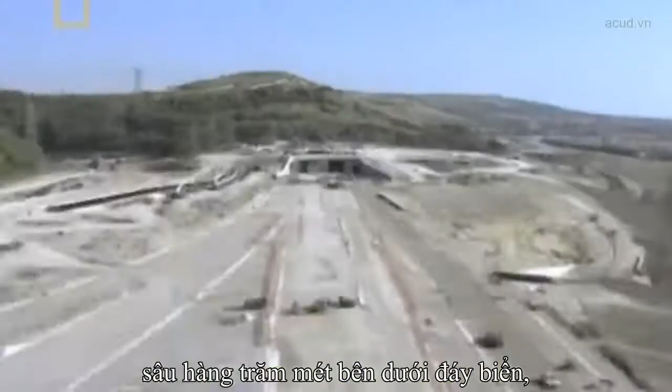Two countries divided by centuries of rivalry and warfare, and by 34 kilometers of treacherous open sea. It was a radical idea to dig a tunnel connecting them 100 meters below the rocky seabed. At stake, billions of pounds and the lives of 8,000 tunnellers. If it worked, it would be the world's longest undersea tunnel. But with terrifying floods, a horrific fire, and financial meltdown, the Channel Tunnel would dice with disaster right from the start.

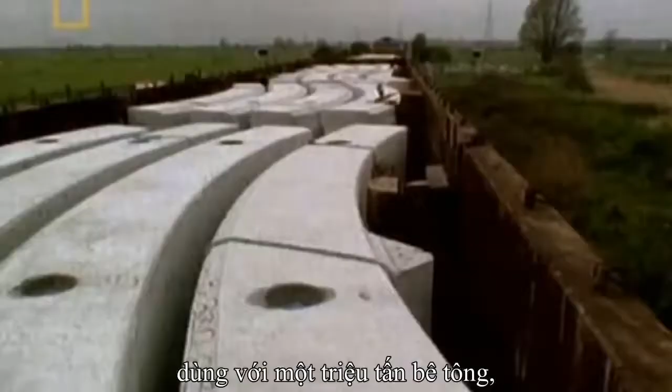This train is making an extraordinary journey that will take it under the surface of the Earth, through one of the world's biggest man-made structures. Engineers call it one of the 7 wonders of the modern world. The Channel Tunnel took 7 years to construct and devoured 1 million tons of concrete, enough to build the Empire State Building 3 times over.

Europe, the nations of Britain and France. Since Ice Age glaciers melted 13,000 years ago, they've been separated by this formidable body of water, the English Channel. At 34 kilometers across, it's twice as wide as the Grand Canyon. The two nations spent hundreds of years at war, right up to the last century. For many on both sides, it's still a love-hate relationship.

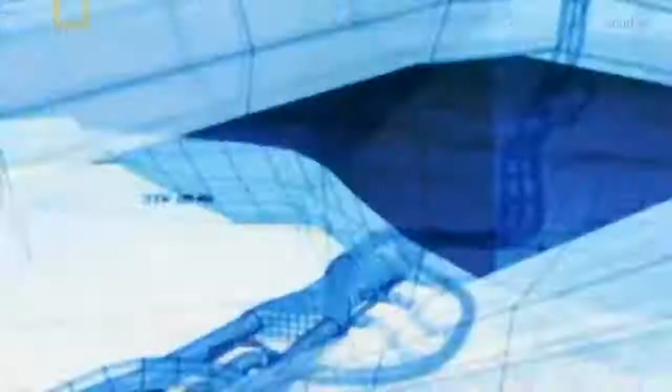So the idea of an undersea tunnel to link these one-time foes caused controversy. But the massive trade boost for both countries was an irresistible incentive. In 1986, British Premier Thatcher and French President Mitterrand agreed to build the Channel Tunnel. But the total £3 billion budget was put up entirely by private finance.

December 1987. The big dig begins. Heading underground were 2 armies of excavators, each over 4,000 strong, 1 French and 1 British. Each team would dig out from its own shoreline, racing to be the first to the midway point under the channel.

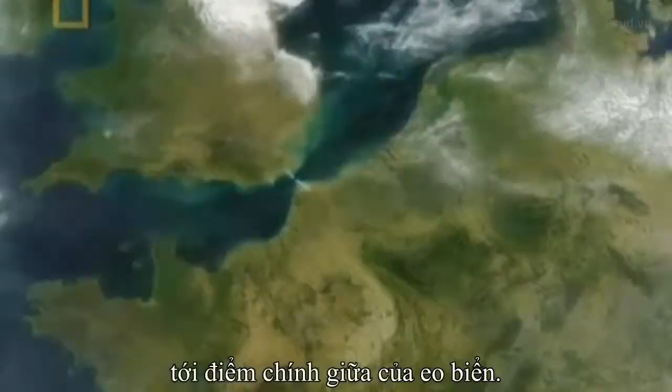The Brits were a tunnelling elite drawn from major worldwide underground projects. Calling themselves the Tunnel Tigers, they set great store by teamwork. One-man armies don't go very far. It takes quite a few lads to keep something like this going.

Commanding them is Chief Engineer Gordon Crichton. You had a team who were totally dedicated to building the job.

The French digging team were the underdogs, locally recruited and trained up for the project. It's the first time any of us have done a job like this. Everyone's proud to be involved.

Leading the French troops was Laurent Leblanc. I couldn't believe I was actually working on such an exciting and colossal project. For me, it was absolutely incredible.

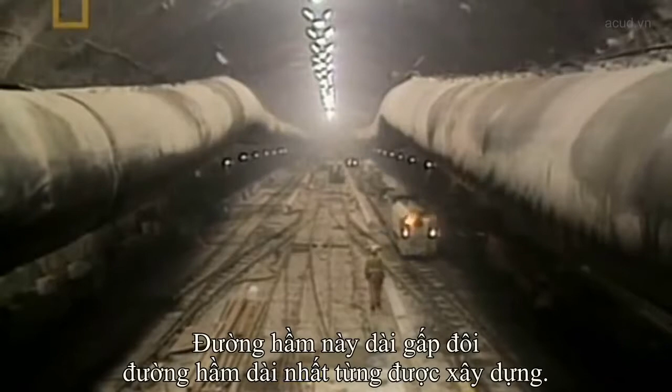The Channel Tunnel would run twice as long underwater as any previous tunnel. The task facing the teams was huge. They had to dig 2 main rail tunnels, plus a central service tunnel, together as wide as a 4-lane motorway.

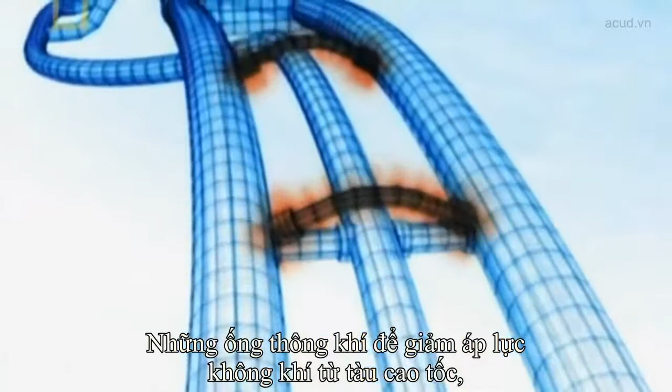245 cross passages, crucial escape routes in the nightmare scenario of a fire or accident in the tunnel. Above the tunnels, vents to release the huge air pressure from speeding trains. And giant crossover caverns, allowing trains to divert from one tunnel to the other to allow for maintenance. It all added up to a staggering 153 kilometers of tunnel to be dug.

As the dig began, the tunnellers were conscious of the vast scale and the real dangers of the task ahead. Above their heads, 100 metres of seawater and rocky seabed. Every day you wonder what you're going into. There's only one way in and one way out. Noisy, hot. You just think, what have I got myself in for, really?

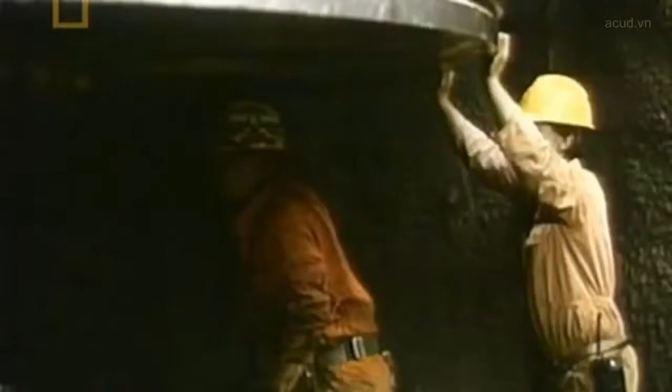Ahead of these tunnelling foot soldiers stood a 17-million-ton wall of earth and rock. It's not a job for claustrophobics. The job would push the men to the limit, but it would also make big demands on the technology of the day.

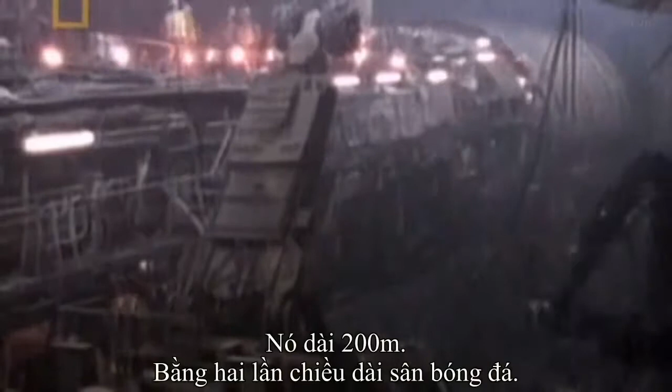Meet the tunnel boring machines. These underground leviathans spearheaded the Channel Tunnel dig. They were 200 metres long, that's the length of 2 football fields. They weighed 1,100 tonnes apiece, as much as a World War II destroyer. And they were twice as wide as a tank.

Yet, as Gordon Crichton reveals, the way that TBMs work is surprisingly simple. Imagine this is the bed of the channel. The machine is rotating underneath the sea, and as it rotates, the spoil from the tunnel is taken out the back, put into railway wagons and carried to the surface for disposal. Also, as it rotates, it erects a lining, a support round it, which is the permanent lining.

Expert tunneller Brendan Riley knew how central the TBMs were to the dig. Basically, the machine is a mini factory. The factory is provided with power, it's provided with water, it's provided with electric. It's a workshop of the machine, preventive repairs. Basically, it's self-contained, it's got everything.

11 French and British TBMs excavated the tunnels 24 hours a day, 7 days a week.

The TBM's high-tensile forged steel blades carved out 10 tons of rock with every turn. The biggest machines cost £10 million each, but as they've been specially designed for this one job, at the end they would simply be scrapped.

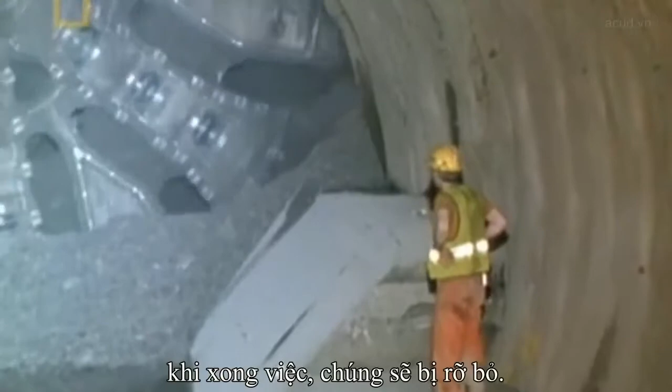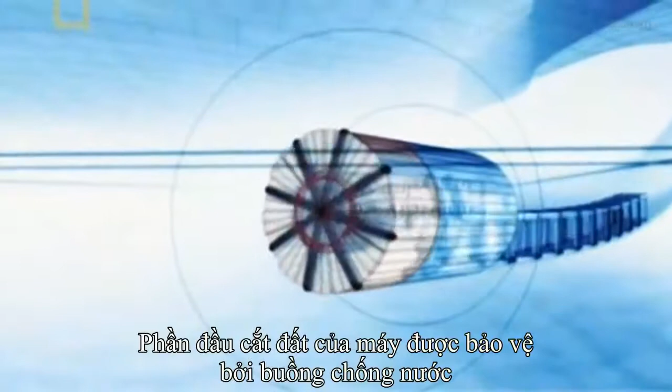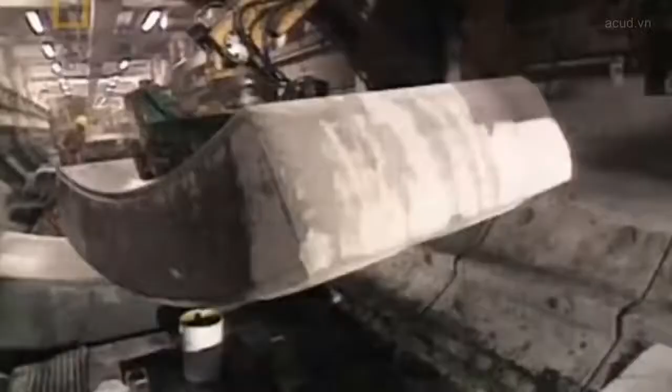The race between French and British tunnellers would be won or lost by their TBM's rate of progress. The Brits had the fastest machines, devouring up to 75 metres and 36,000 tonnes of rock a day. The French machines were 25% slower, but did have a key advantage: their cutting heads were protected by a waterproof housing that allowed them to work on safely, even through waterlogged soil.

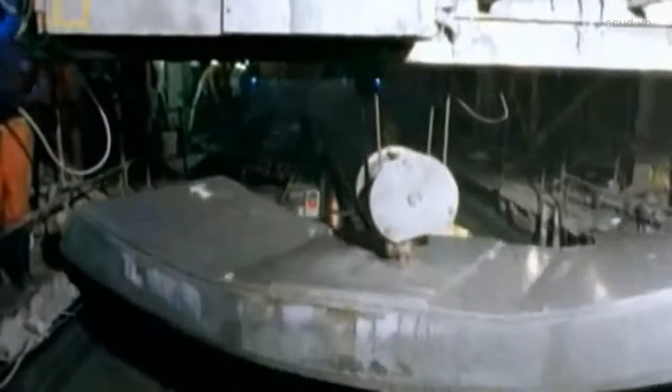1 month into the tunnel dig, with the ground staying dry, the speedier British TBMs began to get ahead. Every day, hundreds of concrete slabs were shipped in to line the tunnel roof as it was dug. They were as big as a family car and 3 times as heavy. This is no ordinary concrete. Specially made to a recipe using granite, it's stronger than the stuff they use to build nuclear reactors.

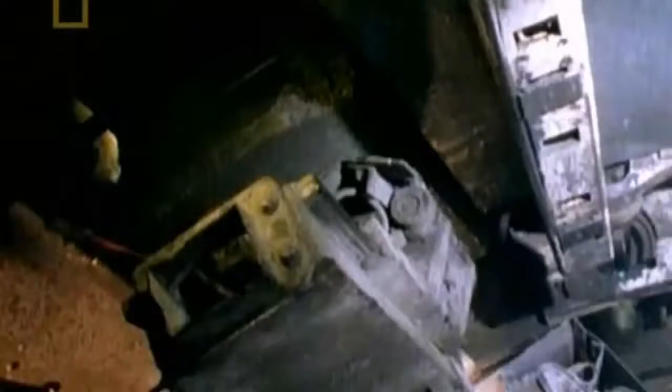The TBM's powerful hydraulic arms pushed the slabs into place, forming the tunnel wall. The TBMs had to be kept supplied with slabs and constantly moving forward. British Chief Engineer Crichton knew that the schedule was tight, and with the tunnel's £1.3 billion budget all put up by private finance, government bailout was not an option. With the dig costing £1 million a day, each hour's overrun would add £40,000.

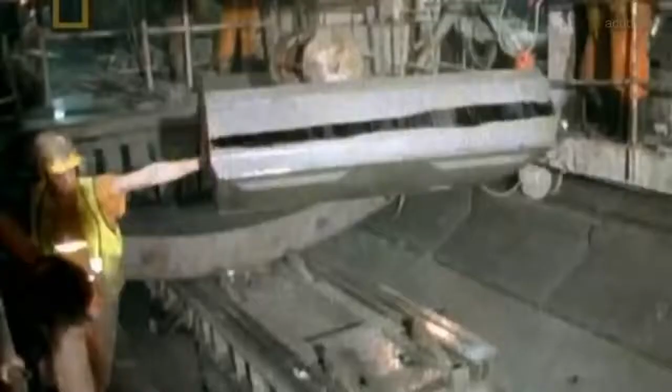By January 1988, the Anglo-French tunnelling race was hotting up, but the Brits were holding on to their lead. The rivalry underground is keeping the dig on schedule, but speed isn't everything. Success relies on keeping both tunnels precisely on target. If they stray off course, lives could be at risk.

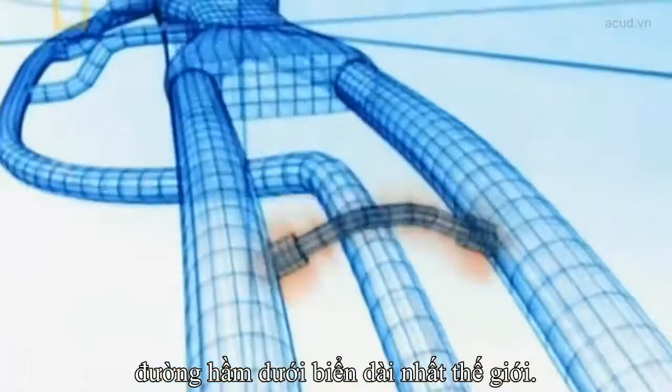It's enough to daunt the boldest of engineers. The Channel Tunnel Project, the longest undersea tunnel in the world. Two rival teams of French and British workers were each digging out from their own shoreline. The plan: to meet midway under the English Channel.

The tunnellers' goal was to win the race for the midpoint. But what kept the engineers awake at night was much more fundamental: the fear that the two tunnels wouldn't meet up.

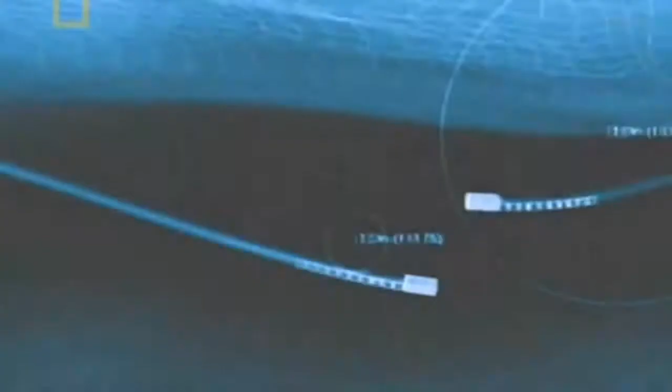If the two tunnels missed each other, that would mean last-minute course corrections, which could create sharp bends. And the high-speed trains that would use the tunnel had to have a broadly straight course to operate safely. The margin for error was frighteningly slim. The tunnels could not deviate by more than 2.5 meters. Being off target was not an option.

But lives were at stake too. If the massive tunnel-boring machines strayed off course, they could hit waterlogged ground. The result could be disastrous: flooding, or worse, tunnel collapse.

It was imperative that the TBMs were guided along a safe and accurate route. That meant conducting one of the world's longest and most in-depth underground surveys.

Rewind to August 1986, 18 months before tunnelling began. When surveyor Eric Radcliffe took on the job of plotting the tunnel's course, he knew the scale of the challenge he faced. France you can see over there, that's the French coast. So we had all that way to drive the tunnel and keep it online for that 38 kilometres. Actually, from here it doesn't look too bad, but it's a long, long way.

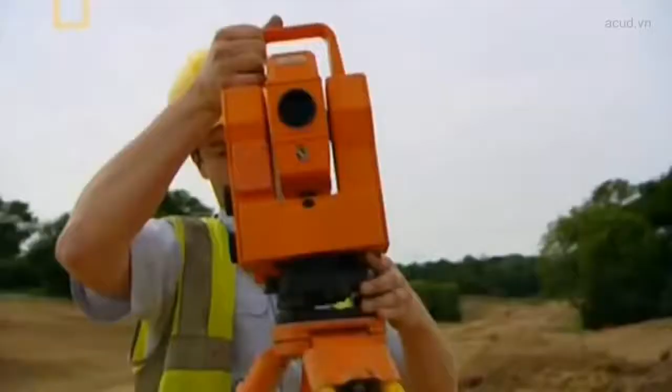Plotting an accurate course over such a long distance underground is a surveyor's nightmare. In tunnels, the normal rules of surveying don't apply. Surveyors normally work by measuring a series of angles at control points along the route. It's all a matter of geometry.

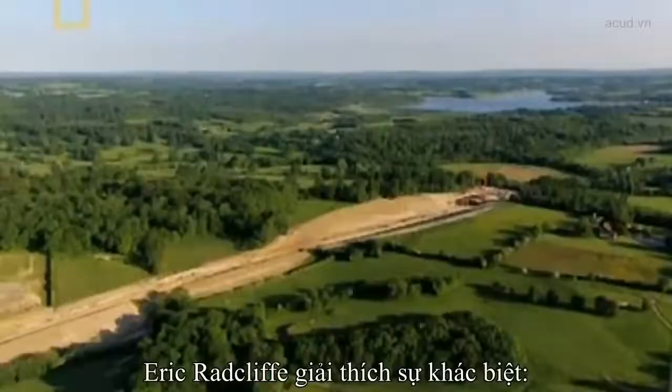Above ground, with 360-degree visibility, plotting a course is relatively simple. Eric Radcliffe explains the difference: the whole road is opened to the air, and all the survey control points from which you do the setting out are already established over the whole length.

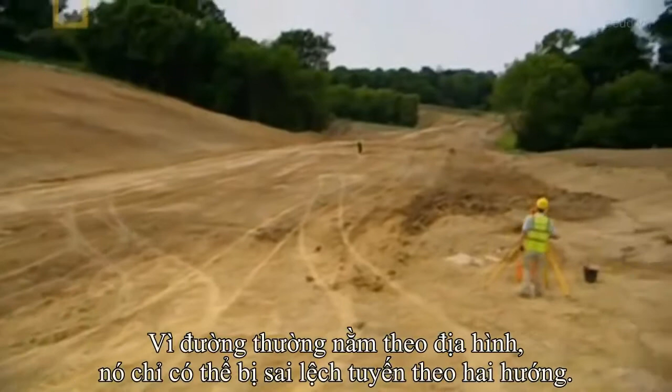Underground, there are obvious complications. All the surveyors can see is a wall of rock. They can't see ahead to plot the course. Roads have one other plus point over tunnels: because they're flat strips on the landscape, they can only go off course in two directions—left or right.

A tunnel occupies a three-dimensional space underground. It can go off course not only left or right, but also up or down. The two halves of the Channel Tunnel had 4 potential ways to miss meeting up. It's like asking a golfer to sink a hole-in-one blindfolded from 34 kilometers.

To keep the tunnel on course and on target, the surveyors had to use a secret weapon: geology. Along its underground route, the tunnel would be driven through a layer cake of different soil and rock types with very different consistencies. The geologists needed one stratum that went right across the channel. This stratum would provide a trail to help keep the British and the French tunnellers on course. But it must be exactly the right type of rock for tunnelling.

Jean-Luc Dessein was one of the geophysicists charged with tracing the perfect stratum for the tunnel to follow. On the French side of the channel, Dessein began his search. It would have to be waterproof to resist flooding, and compact enough so it wouldn't collapse during the dig.

In these cliffs, Dessein found his prize. Water poured over this seam of rock without soaking in, evidence that it was waterproof. The soft rock, impervious, so no water in the tunnel. This is a perfect situation for boring a tunnel. It's called blue chalk.

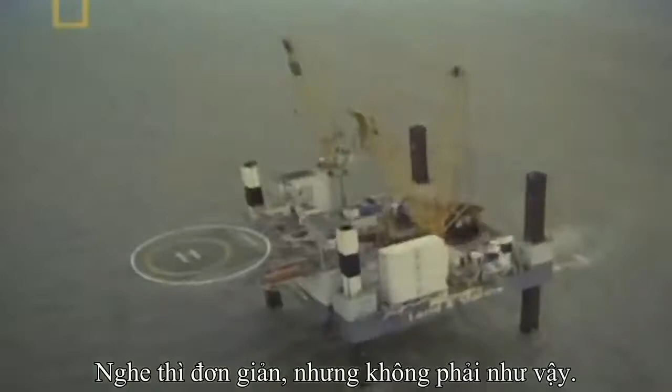But it was one thing to identify the ideal rock, another to discover its course. Geologists drilled a series of boreholes into the seabed and dropped probes that fired sound waves deep underground. The aim: to measure changes of speed in the sound waves as they passed through different rock and soil layers. It sounds straightforward, but it wasn't. Tracing the course of the blue chalk meant sinking 12 of these boreholes right across the channel, a tricky task in one of the world's busiest sea lanes.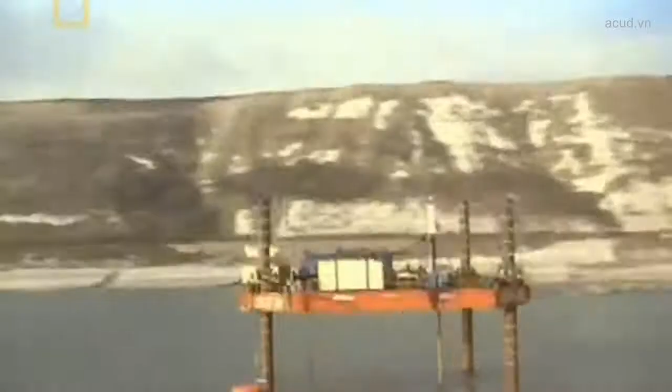You have a high traffic of vessels, you have tide, you have waves, so it's a difficult place for making accurate investigations.

The geologists concluded the blue chalk would provide a feasible route across the channel. If they were wrong and the TBMs left the waterproof strata, they could hit waterlogged ground, with devastating consequences, flooding or even tunnel collapse.

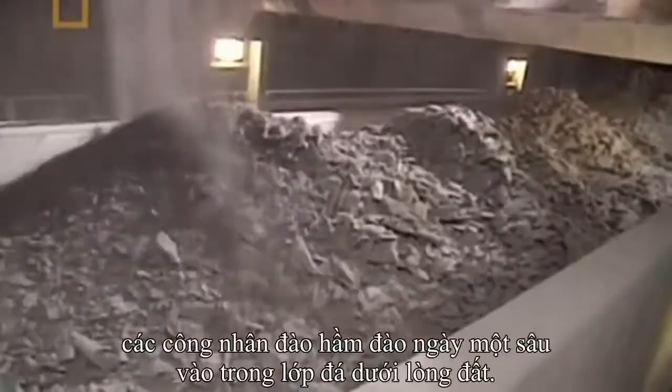Spring 1988, 3 months into the Channel Tunnel dig. The tunnellers were gouging their way through the rock deeper and deeper underground.

Standing between the tunnellers and the risk of flood was the TBM's laser guidance system. Laser guidance is commonly used to keep above-ground structures like roads on course, but underground it had to be used in a more imaginative way. Instead of looking ahead to see where they were going, the tunnellers looked back to where they'd been.

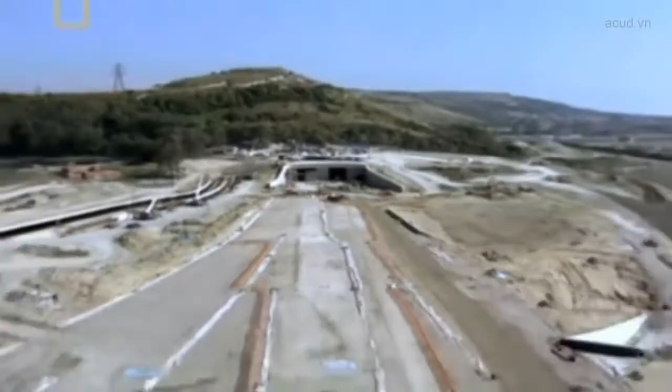Laser beams continually scanned backwards to the tunnel's start point to compare it with the TBM's changing location. Computers then checked this data against the surveyor's course coordinates. For tunneler Brendan Riley, the laser guidance system was one of the TBM's most impressive features.

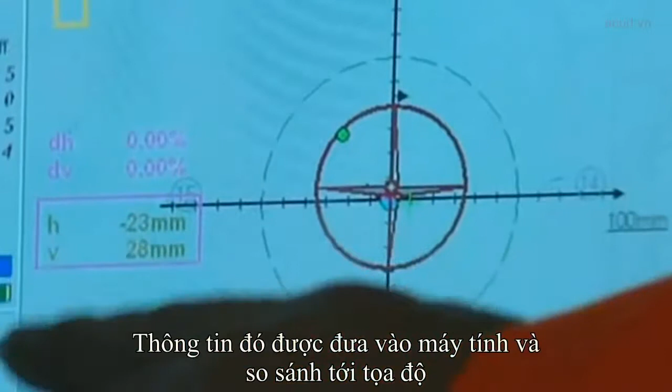As the machine moves forward, the laser monitors the change in movement to say whether the machine is moving left or right or up or down. With that information fed back into the computer, it compares that information with where the TBM should be at that known point in time, and gives that information back to the driver to say whether he needs to steer up or steer right.

As the tunnel face moved further from dry land, conditions for the men got worse. Engineering manager Ian Fugeman recalls the scene.

Anybody going to work had to travel in a cramped train up to 22 kilometres out to the place of work. By the end of the dig, the workers' trains had clocked up enough miles to go to the moon and back 4 times.

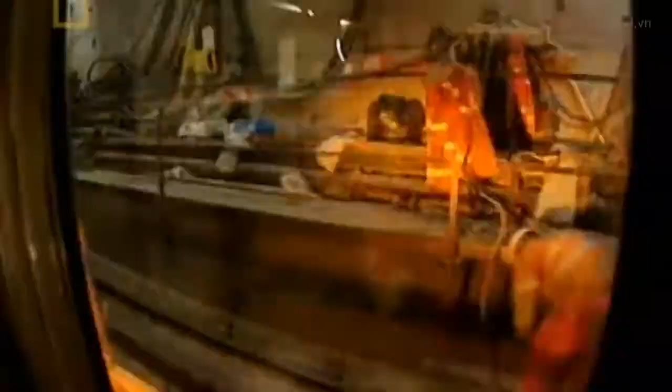This far underground, keeping the air fresh is a major challenge. A massive ventilation system pumped air to the tunnel face. But the men still faced the risk of encountering toxic gases.

The further in you are, the warmer it gets, the less air. We carried respirators with us. If there was an accident, we'd have enough air to breathe with.

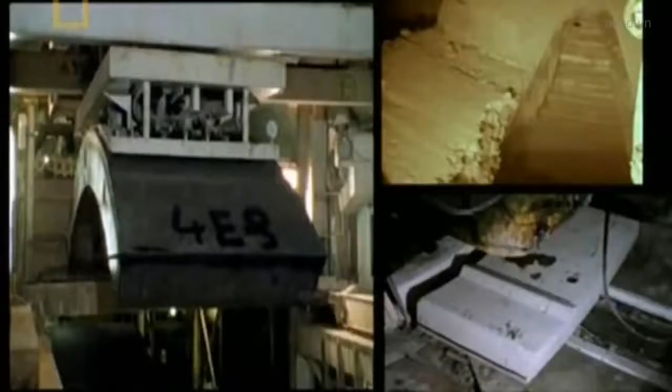But Chief Engineers Gordon Crichton and Laurent Leblanc, the frontline commanders of the tunnel dig, were starting to breathe easier. The schedule was holding up, and so was the layer of blue chalk.

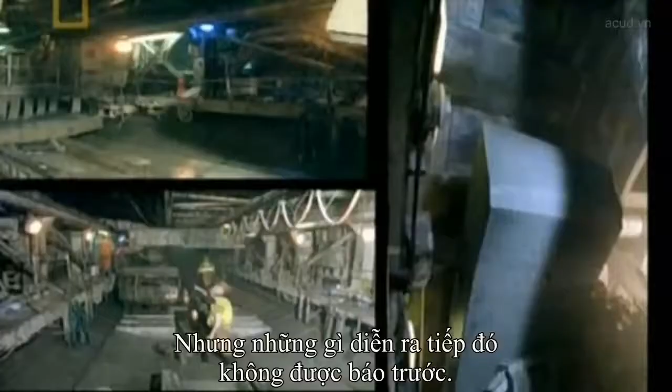But what happened next came without warning. March 1988, the service tunnel on the British side. Suddenly, what no undersea tunneler ever wants to see: water. Thousands of gallons of it flooding into the tunnel. Work comes to a halt.

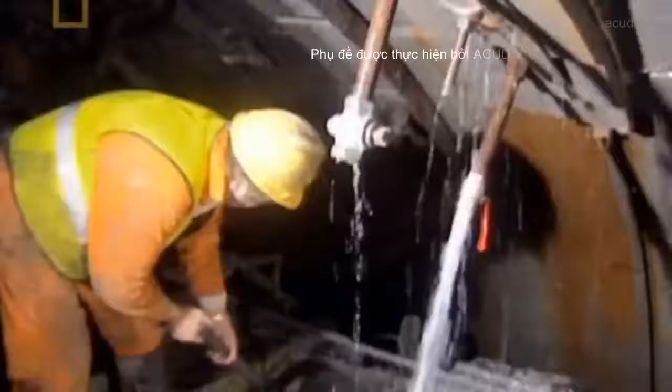That could cause panic. We have to stop straight away because you don't know exactly what you're going into. But Gordon Crichton must act fast to find out where the water is coming from.

Is this just a random pocket of fresh water, or is the sea itself breaking through? He tastes the water, and it's salty. We knew we had a path right to the channel itself. We knew it was serious.

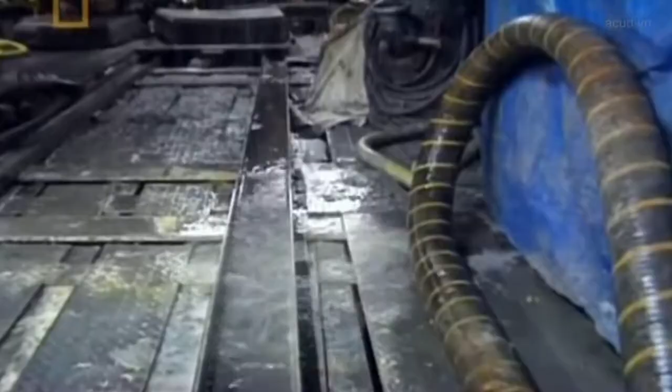It's disastrous news. What's coming into the tunnel is seawater. The men know that above their heads there's 3,000 billion tons of it. The pressure on the seafloor 50 meters above is enough to crush a car like a beer can.

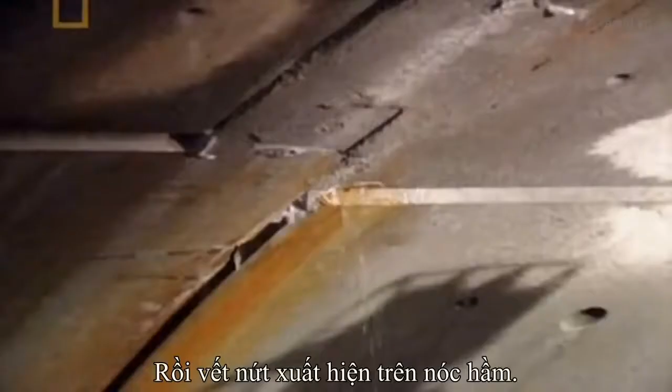Now, in places, the water starts to burst through with the force of a fire hose, 300 litres a minute. Then a crack appears in the tunnel roof. Rocks start to fall. The water is pouring through fissures and loosening lumps of the tunnel roof.

The British tunnellers might just be on the edge of disaster. If the cracks worsen, they might let in enough water to weaken the tunnel. Ultimately, it might even lead to the tunnellers' biggest fear: collapse. Chief Engineer Crichton must find a way to plug the leaks, or they could face catastrophe.

But how could this be happening? An 18-month survey identified the special layer of rock called blue chalk that was meant to be waterproof. But the geologists are quick to point out that surveys based on sound waves can reveal the course of a rock layer, but they can't give a definitive picture of the rock's quality. Now it turns out that the stratum of rock the tunnel is driving through is fractured, riddled with fault lines and cracks, something the surveyors could not have foreseen.

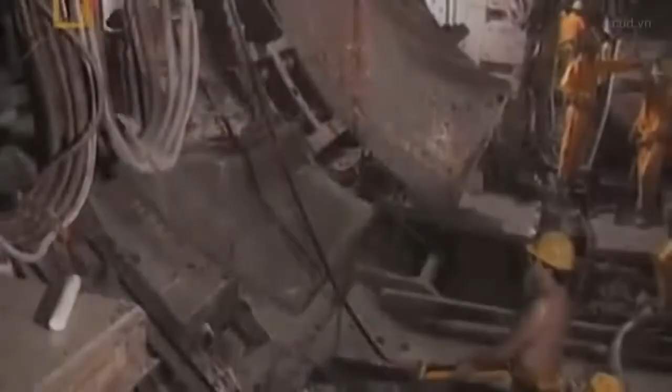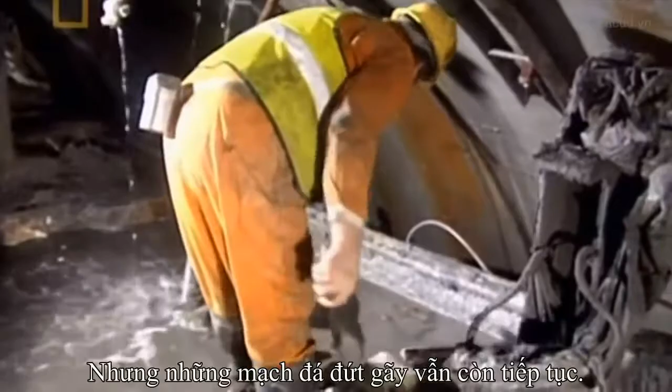Back in the British tunnel, Engineer Crichton averts disaster. The men plug the leaks and concrete liners are replaced by stronger cast iron versions. Crisis over for now, the tunnel tigers start to inch forward again. But the fractured ground stretched on, and the atmosphere was edgy.

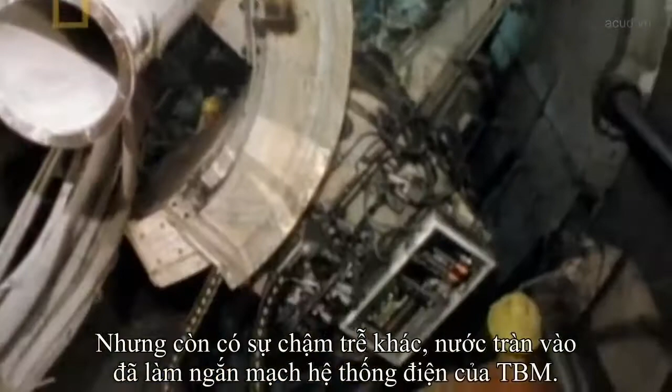Every ring that you cut, you were just hoping that it was going to be good ground that was there. But there were more delays as the leaks short-circuited the TBM's electrics. The clock was ticking. With every day, the costs were mounting, and the overspend was running into tens of millions.

The French side, meanwhile, had also hit water. We did indeed hit water. That made the job more difficult. A lot of water always makes the work harder.

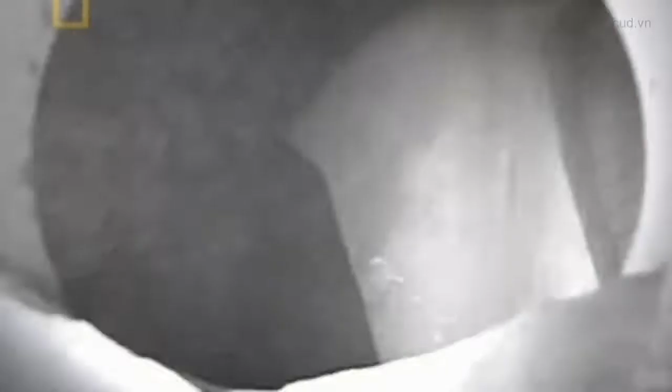But the French had been forewarned about fractured rock on their side. Features in the geology made it much simpler to analyse. Now the French decision to opt for waterproof tunnel boring machines finally started to pay off. Slower than the British TBMs so far, they now gave the French a serious edge.

We decided to use tunnel boring machines that were totally enclosed, totally watertight. These could resist any level of water leakage, no matter how severe. Meanwhile, the Brits slogged through the leaks and falling rocks and prayed for better ground. Workers rigged a form of makeshift armour plating on their TBM and pressed on.

January 1989. After a tortuous nine months, the British team finally hit drier ground. Massively behind, the pressure to catch up was now intense. Everybody worked long hours. We had to do it to the time, we had to do it to the programme.

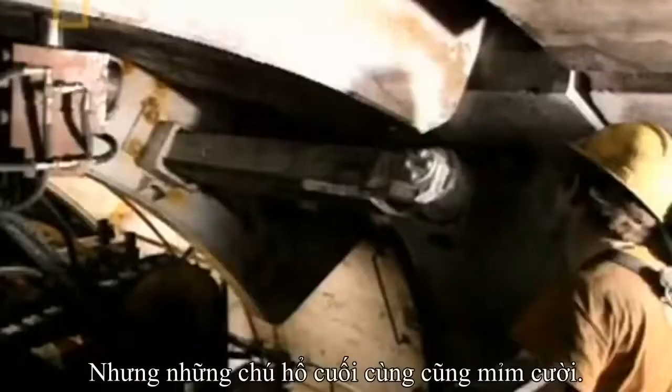But at last, the Tigers were smiling. The ground conditions come right, everything seemed to fall in place, and then we started taking off. The British tunnellers fought their way back into the race. We've done over 400 metres quite a few times in a week, and I personally think we could have done the half kilometre.

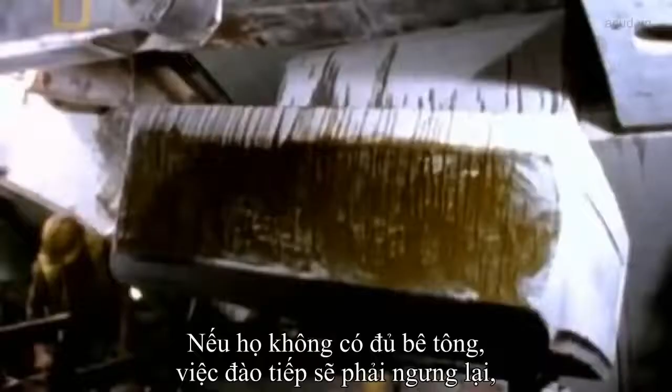But success came with a sting. The British progress started to stretch the supply of lining slabs. If the slabs ran out, their dig would grind to a halt, with a multi-million-pound meter ticking.

January 1990. The French and British tunnelling teams were two years into digging the record-breaking Channel Tunnel. The competition between the two countries was fierce as they dug out from their coastlines. If all went to plan, the tunnels would meet up some 18 kilometres out, midway under the English Channel.

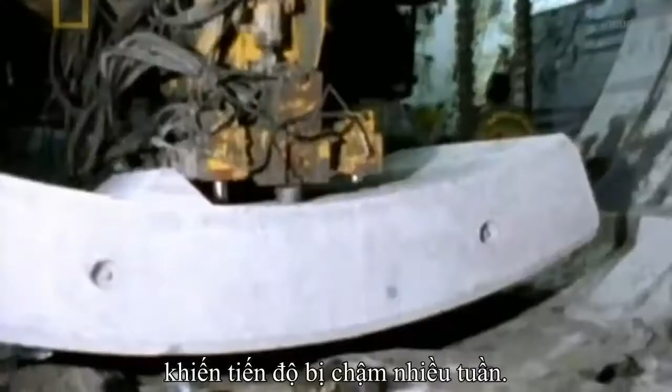Flood and rockfalls on the British side nearly spelt disaster and set progress back weeks. But now the Brits were catching up again, and the race for the halfway point was back on with a vengeance. But there's more to building a tunnel than high-speed digging.

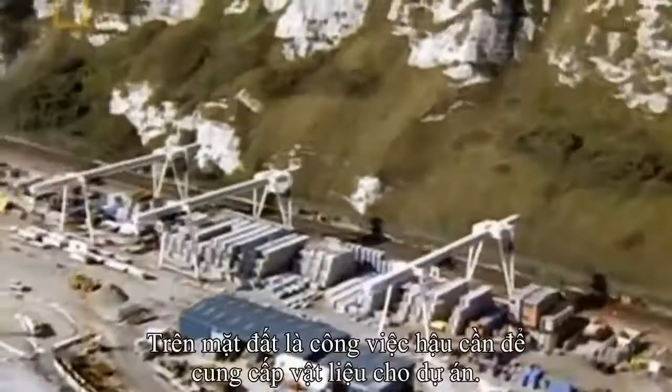Above ground, a huge round-the-clock operation kept the project fed with vital supplies, the most crucial ingredient of all being concrete.

Each slab weighs as much as a pickup truck. The French and the British together need 750,000 of them to line the tunnel.

In Britain, special trains carrying 4,500 tons of slabs, enough to construct 100 average houses, speed back and forth to the coast. But the British team was about to hit another problem.

The flat French shoreline provided plenty of room to store slabs close to their tunnel mouth, but 50-metre cliffs on the British side hugely restricted storage space. And as their tunnelling rate increased, space got tighter and tighter. If it ran out altogether, the supply chain would slow, the dig falter, and the mounting overspend could spin out of control.

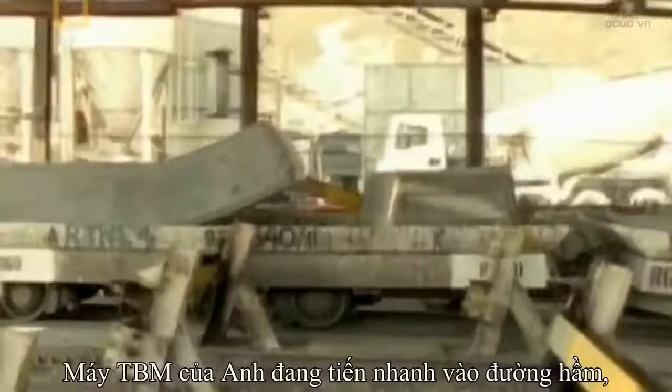The British TBMs were munching their way through the tunnel, but without slabs to line the roof, they would soon grind to an expensive halt. Luckily, somebody had a brainwave.

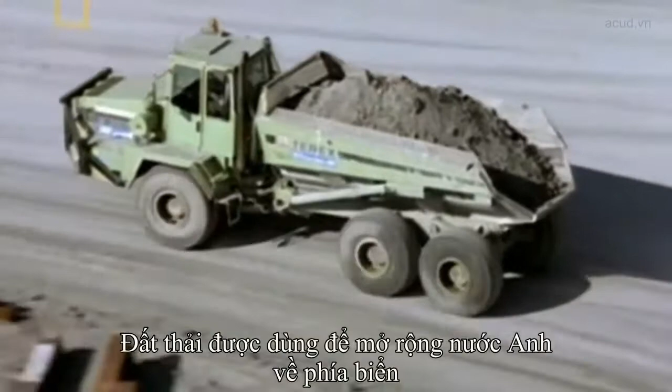Every day the TBMs produced up to 36,000 tons of unwanted rock and earth known as spoil. Why not use it to solve the storage problem? The spoil could be deployed to extend Britain's coastline out to sea, providing desperately needed space.

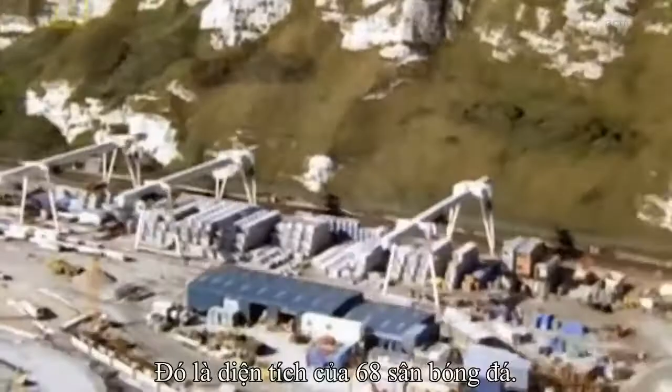It was an audacious plan. 17 million tons of spoil, enough to fill over 2,000 Olympic swimming pools, were dumped into the sea. The storage problem was solved, and Britain grew by 90 acres, the area of 68 football pitches.

Underground, the moment of truth was approaching as the French and British tunnellers edged ever closer together towards breakthrough point. The tunnellers were intent on reaching the middle first, but the engineers had bigger worries. After 3 years and 37 kilometres of tunnel dug, would the two halves actually meet in the middle?

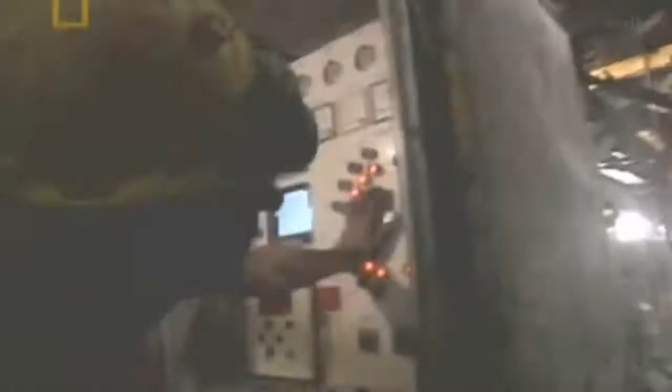The British reach what they think is the rendezvous point first, but are they anywhere near the French? As a small drill bites through the soil, a current of fresh air wafts through. Air from France.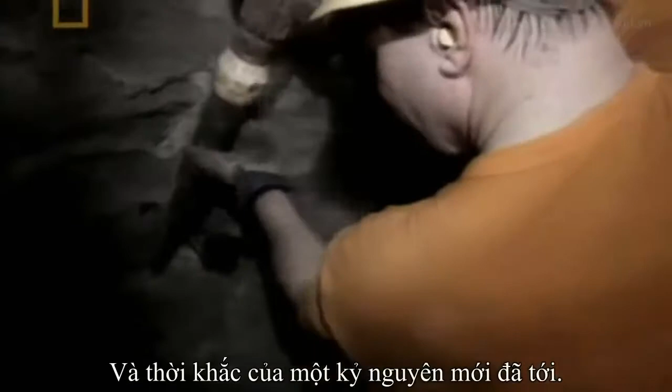French and British workers raced to punch through the last few centimetres of rock that had separated the two nations since the Ice Age. And then, an epoch-making moment. They're through! They're through! They're through!

And it's British tunneler Graham Fagg who takes the first step into French territory and into the history books. To me, it's just fine for a day. I'm just an individual who was part of a team.

To see Graham making that connection and putting his head through the hole and disappearing into France, as it were, for the first time, that was fantastic.

For the first time in 13,000 years, Britain was reconnected to the European landmass. And the surveyors were vindicated. The tunnels didn't just meet, they met a minuscule 35 centimetres off target, the width of a portable TV screen.

No one had ever done it before, over 38 kilometres. From a surveyor's point of view, that is a unique achievement.

The Tunnel Tigers basked in their achievement. I think it's great. We're getting past halfway, so I suppose in a way we beat the French. So the British won the tunnelling race.

But if the French had got to the RV point first, there would have been a wait while the Brits scrambled to catch up.

Here's why. Job done, the TBM's only value was scrap. But two machines were stuck head-to-head in a monster gridlock. One side's machine had to go. But what do you do with an 1,100-ton TBM that's past its use-by date?

Bury it. It was agreed that the British TBM would dive below its French counterpart to be entombed forever, 100 metres below the surface of the channel.

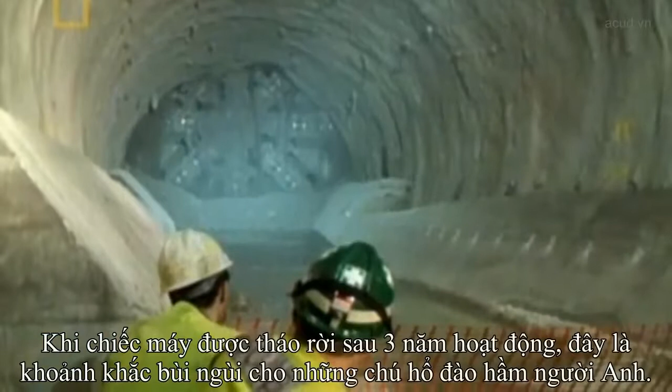As man and machine were parted after 3 years, it was a poignant moment for the Tunnel Tigers. You see the machines buried and you get a bit of a twinge, you know.

The French TBM was towed to Britain to be scrapped, so the Brits made the first breakthrough, but a French vehicle took the first trip under the channel.

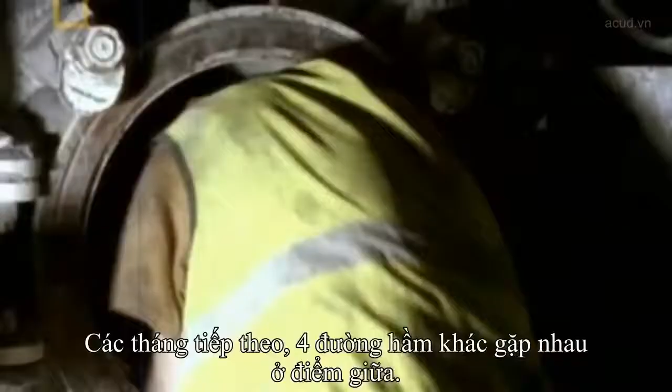Over the following months, the 4 other main tunnels met up in a flurry of breakthroughs. The tunnellers carved out hundreds of linking cross passages every few hundred metres. They drilled out the air pressure shafts. They finished off the crossover caverns. May 1991, the Channel Tunnel was finally dug.

The most important thing is that you can stand behind us and look straight through, and that's it.

For the French too, there was a tremendous sense of the significance of the moment. It's an historic moment. Napoleon tried to build a tunnel but failed. Now we have one Europe.

But behind the scenes of celebration, there was one group who weren't quite so jubilant: the tunnel's financial backers. The French and British might have dug the world's longest undersea tunnel, but delays saw the budget soar from 1.3 billion to over £2 billion.

And the job of building the international transport network serving the tunnel had only just begun. As the tunnellers headed home, another army of workers took over. They would build two huge terminals on either side of the channel, lay 195 kilometres of railway track, and to extract the heat generated by high-speed trains, fit a giant cooling system equal to 250,000 domestic fridges. They would also build new trains designed to carry cars, trucks and people through the tunnel.

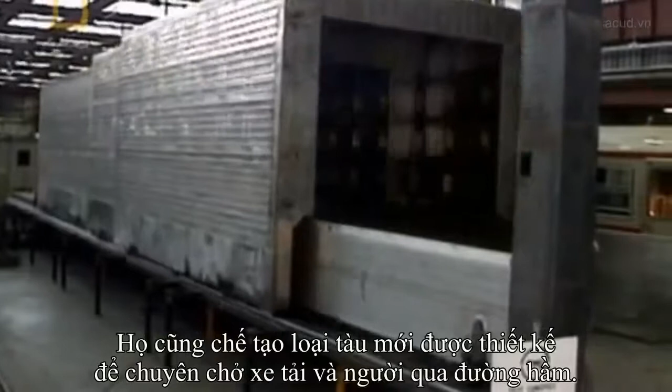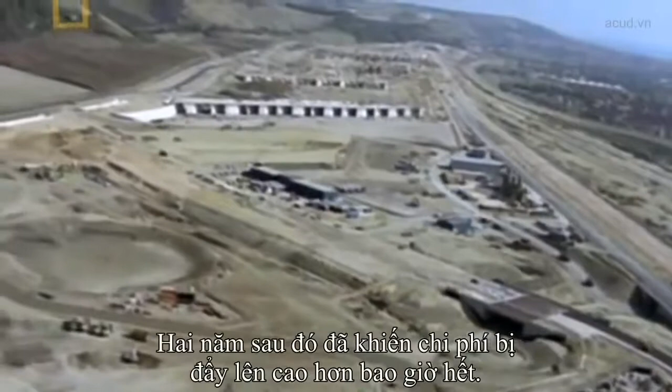But if the tunnel's investors had any hopes that Phase 2 of the project would come in on time or budget, they were in for a big disappointment. Two years later, overruns had driven the spend higher than ever. The terminals, the track, the trains - they all busted the budget.

May the 6th, 1994, the Queen and French President Mitterrand opened the Channel Tunnel. A year late. Delays and interest charges had racked the total cost up to £10 billion, enough to launch 33 space shuttles. Financial institutions of many countries collaborated to finance this, the biggest privately funded construction project ever undertaken.

But business wasn't booming. At first, the tunnel trains could only take trucks. It was 6 months before the tunnel could handle cars and passengers. A cross-channel trip by ferry from Britain to France takes an hour and a quarter. Using the tunnel slashed the journey to just 35 minutes. But take-up was low. Some speculated that people were fearful of being underground if there should be a disaster.

Meanwhile, high interest rates and massive competition from ferries and airlines dragged the tunnel even deeper into debt. And then, just when things seemed at rock bottom, everyone's worst fears were realized. By 1996, the Channel Tunnel has been open for over a year, but business is poor, and the tunnel is about to face its darkest hour.

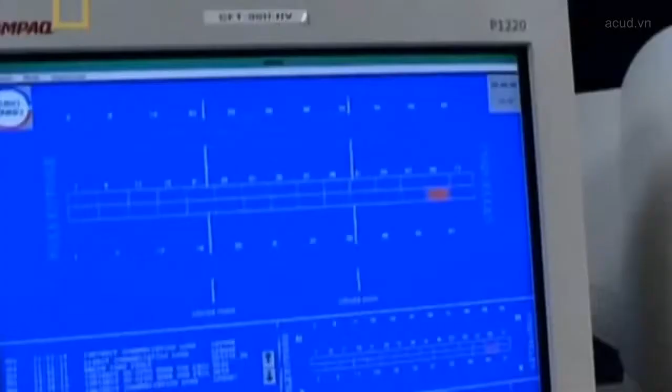10:02 p.m. Using fire sensors, controllers identify a hotspot in the main tunnel that they think must be the train. They open the nearest cross-passage door remotely.

The controllers now direct French firefighters into the central service tunnel to cross-passage door number 4101. It's the one they think is nearest to the passenger coach. It's a 15-minute journey, and for the stranded passengers, time is running out.

In the tunnel, trucks are now exploding. Tyres on the lorries all blowing. The train was just rocking from side to side on the track, and that was actually happening while we was lying on the floor.

The temperature climbs. At its peak, it will reach 1,000 degrees centigrade. So hot, the train's steel wheels are welded to the rails, and the concrete lining of the tunnel itself becomes dangerously unstable. It's where the moisture within the concrete expands and then explodes out with terrific force, very much, I would imagine, like shrapnel in a war situation.

10:20 p.m. Firefighters arrive at cross-passage door 4101. But to their horror, there's no train. It's the wrong door. The chances of saving the passengers are receding fast.

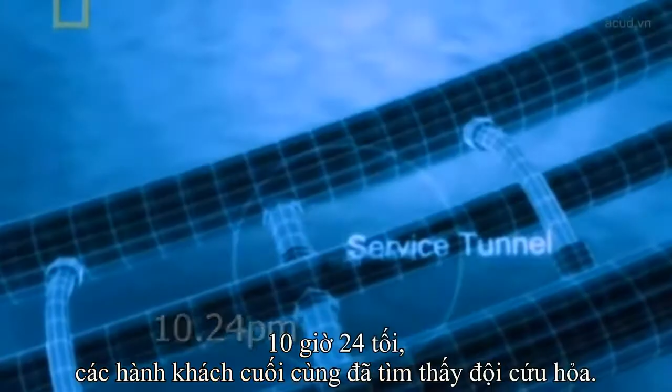At 10:24 p.m., the passengers finally find the firefighters. It's 40 minutes since the fire was reported. We was just very, very lucky on that night to be alive today.

No lives were lost, but it was a grim reminder of the perils of an emergency so far underground. One or two of them were near to collapse. They'd endured 20 minutes of having to breathe in acrid smoke, and it was very fortunate that we didn't lose any lives. But the system worked.

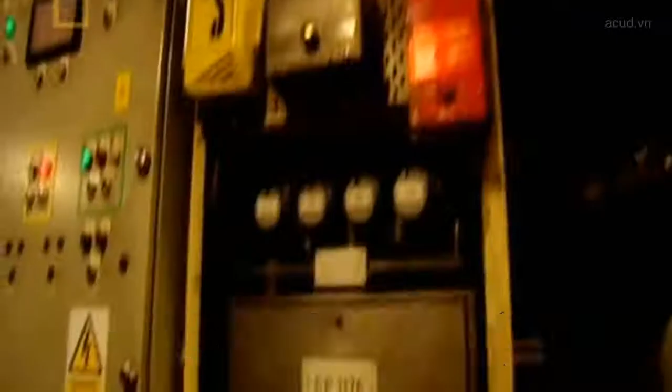After the fire, an urgent safety review results in improved fire sensors, better emergency lighting, and promises a quicker future response from firefighters. The tunnel was repaired and reopened in just 2 weeks, but the damage to its image would take longer to overcome.

1999, the last year of the century, the last year of the millennium. At last, a good year for the Channel Tunnel. More than 5 million cars and trucks travelled on the underground rail link between the British and French coasts. Nearly 7 million people use the passenger service that links London, Paris and the Belgian capital, Brussels.

10 years on, and nearly 150 million people have travelled through the tunnel. That's more than twice the UK's population.

Now, Britain and France are to be brought even closer via a new high-speed rail link from London to the tunnel entrance. Trains reaching 300 kilometers per hour will speed passengers to Paris in 2 hours 15 minutes, half the journey time of the pre-tunnel era.

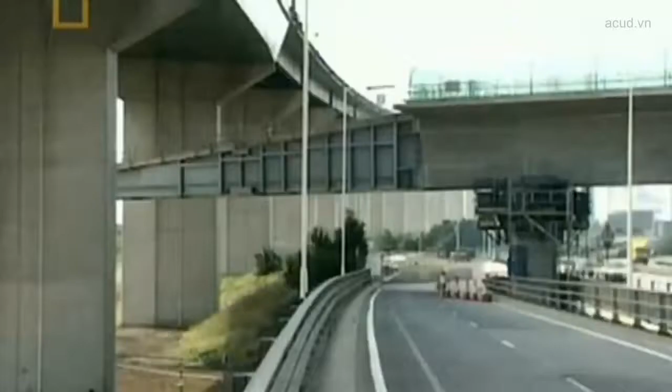So far, the line's on budget and on schedule. It will complete a vast pan-European transport network. At its heart, the Channel Tunnel itself.

11 men lost their lives while building the Channel Tunnel. For British Chief Engineer Gordon Crichton, the tunnel stands as a permanent testament to them and to all those who built it. People were proud to work on it, and I really think that's what saw it through at the end.

For Crichton's opposite number, Laurent Leblanc, the tunnel represents a personal best. For me, it's a great memory, the experience of my life, without a doubt.

An undersea tunnel to unite two nations with such an ambivalent relationship seemed an eccentric plan. But the Channel Tunnel has overcome skepticism, grappled with a debt mountain, and endured fire and flood. It's become one of the engineering wonders of the modern world, and changed the shape of Europe forever.